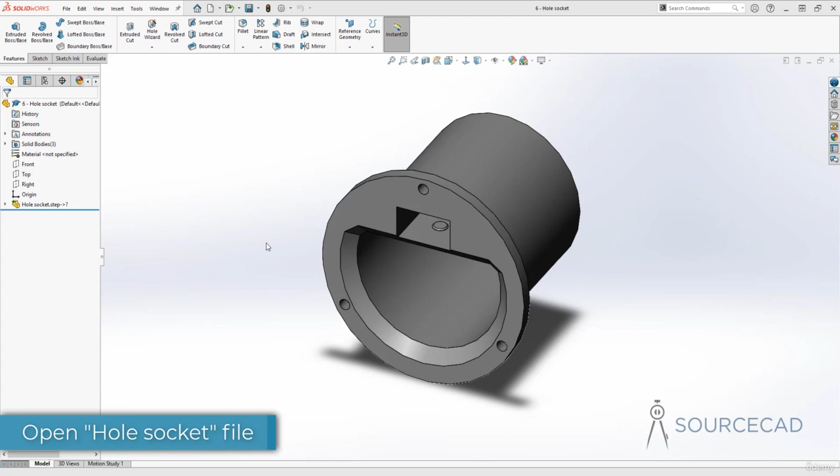Let's now talk about markups in SolidWorks. Using markup, you can mention changes that you need in your part right inside your SolidWorks part. You don't need to mention these changes in a separate file.

Now I'm using this part here, and let's for a moment assume that we want to make a few changes. For example, here we have 3 holes. We want 6 of these holes right here. Also, we want this chamfer to have a smaller length, and we want fillets on all these sharp corners. So these are some of the changes that we want in this part, and we just want to mention these changes somewhere in this file.

Now to do that, I'm going to use markup. The markup is available on its own separate tab, and right now we don't have that tab yet, but you can activate it. Right click anywhere on this tab, select tabs and activate markup right here. And now we have a new tab called markup. I'll select this tab, and here we have all the tools, but currently all of these tools are deactivated. As soon as you add a markup, the tools will show up.

Also, if you look at this design tree, we don't have any folder called markup, but once you add the first markup, a new folder will be created with all the markups. So let's go to this markup, and here we've got the folder now. Inside this folder, all the markups will be saved. After selecting this, you need to go to this draw option, and now you can draw with freehand sketch.

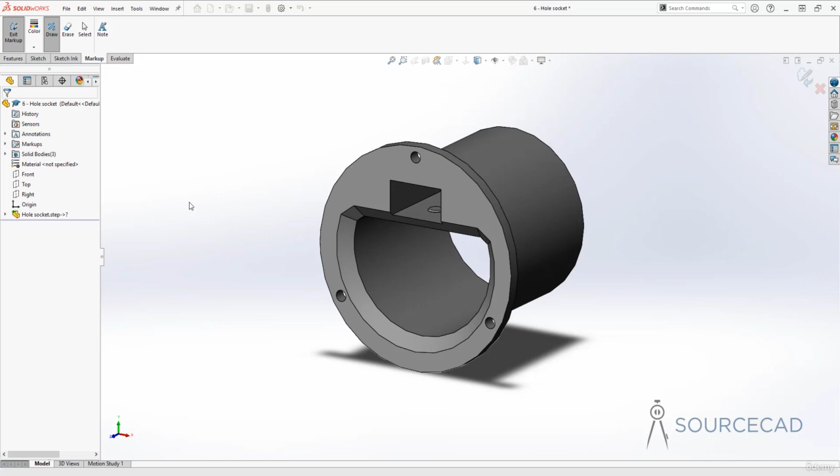I'm going to start with this hole, and make an arrow like this, and let's add a text here. I'm going to select note, and type make 6 holes. All right, so we've got this. Now click OK to exit out of this. Our first markup is added, and you can see that markup right here.

That's markup 1. If you want to add more details, once again you can go to draw and start making changes. But before I do that, let's change the color of this markup. Right now it's this yellowish color. I'm going to change this to red. And now let's make the second markup.

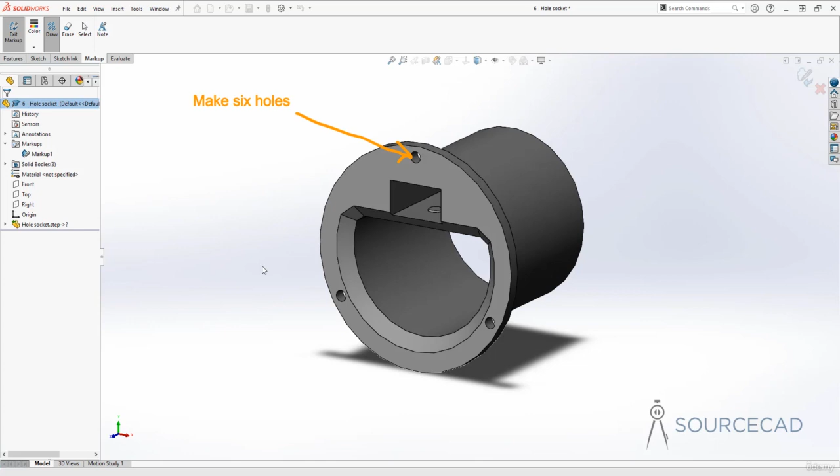I'm going to go to this part of the drawing, and here we want to change the chamfer distance. So I'll make this arrow and again a note. So here we have this note. Again, in this case, as you can see, the size of text is really huge. I'm going to make it a bit smaller, maybe 8 units.

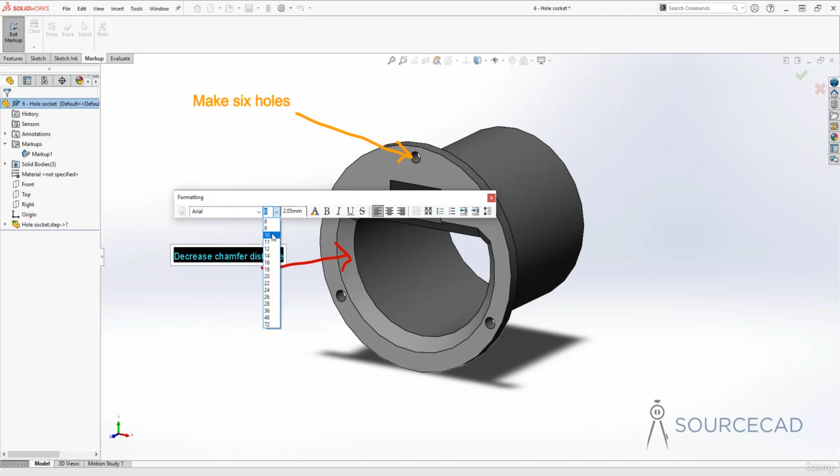All right, there we are. Or maybe we'll make it 9 units. 9 units is going to look fine here. So we've got this. Now I'm going to click OK. So that's our second markup.

Now finally, the third markup. But for adding the markups, I'm not going to orbit my drawing, because markups are added in your current view. So I'm not going to change that. To add the markup, I'm going to select another one here. But as you can see right now, when I added this markup, it will add it right inside markup 1.

So basically I've added 2 separate markups, but SolidWorks will think of it as a single markup because we have added it in just one single view. So now if you want to add another markup in a different view, then you need to first exit out of this markup environment. So I'll just exit out of this, and we have got this markup 1 added here.

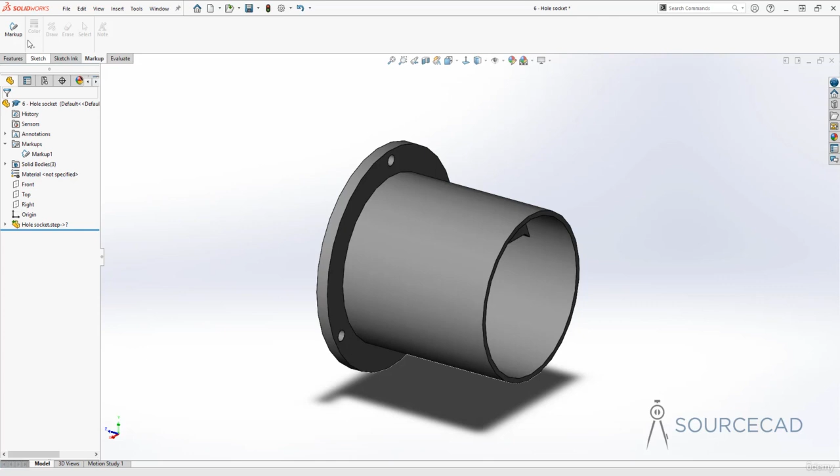Now let's orbit this drawing. And as you can see, when we orbit the drawing, the markup will disappear. Okay, so that's our first markup. Now we are ready to add the second one. Now in this view, once again, we can add another one. So I'll go to markup, and let's just add it here.

So right here, and we just want fillet. So here and maybe here as well. So on this corner also we want a fillet. So I'm going to attach it both with just a single arrow. So here, and then I'm going to add a note. So here, add fillets. There we are, we've got the second markup.

Now once again, without changing the view, if you add another markup, SolidWorks will just add it in markup 2. But if you exit out of this environment and then change the view and add a markup, it will add it as a new one. So here in this case, we are okay with these 2 markups only.

And now if for some reason you just want to erase any existing markup and maybe create a new one, you can also go to erase and then just click here, and that's going to erase it. But that's not what we want. So I'm going to just exit out of this environment. And here we are, we've got the 2 markups. Now markup 1 and markup 2.

Now if you want to go to any of these markups, just select that markup and select orient. Now this will automatically orient you to that direction or to that view. Again, here in markup 2, I'll select orient. It's going to take me to markup 2.

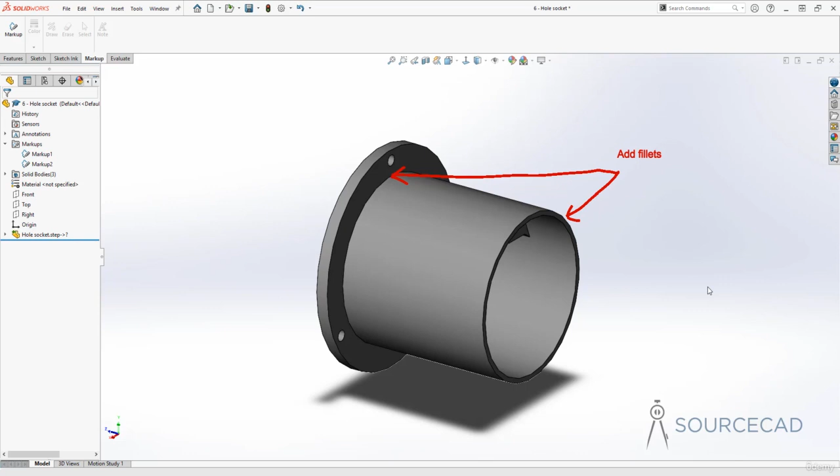Now you can also export these markups in a PDF file. For example, I'll go to this markup 1 and I'm going to select Orient. Now we can export this. So again, right click and select export markup. Now you can specify a location. So let's just specify desktop as the location, and I'm going to call it sample markup, and okay. And let's see now.

So here we are, here we have sample markup. So double click and that's our markup exported here in a PDF document. So you can now send this PDF document if you're not comfortable sending your actual SolidWorks file. And that's how you can export the markups.

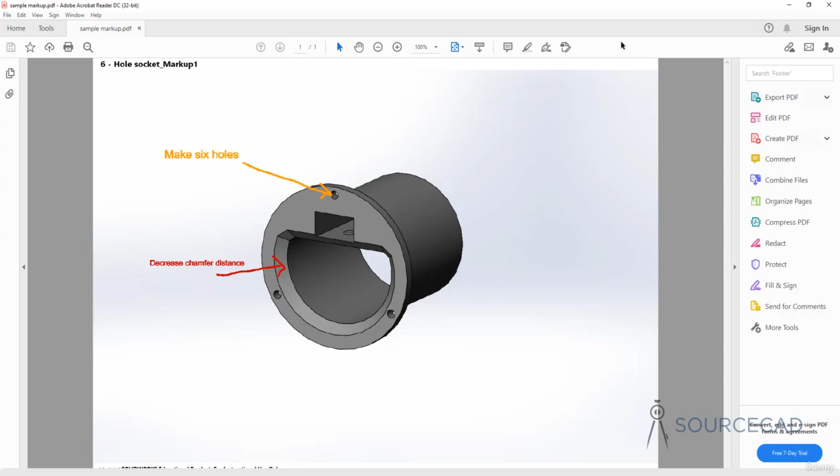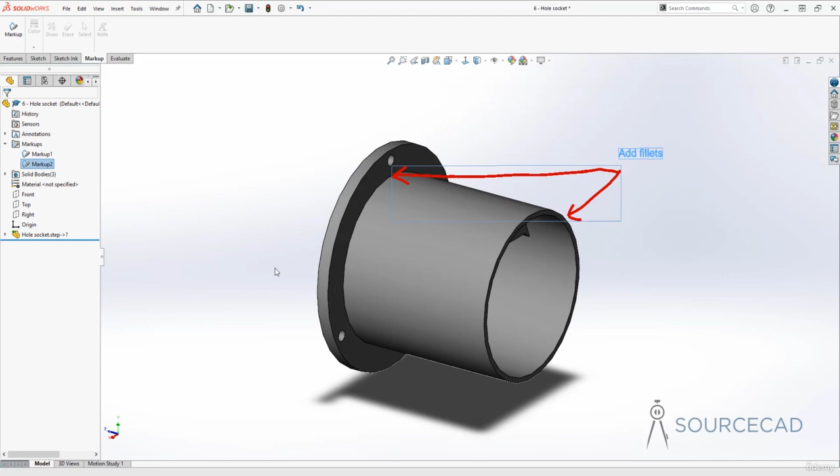But as you can see, you need to export several markups. So if you have created all of these markups in different views, then you may need to export several different PDFs if you want to just do that. Or if you just send this SolidWorks part file, well, anyone can just change to that markup view and see what's inside these markups. Now, if you want to hide these markups, you can do so very easily as well.

So just go to the markup and select hide, and now the markups won't show up, kind of like this. So here we are, we don't have the markup even when you orbit your drawing. If, however, you just make it visible, markups will show up when you orbit your drawing, kind of like this. So that's a thing which you may want to keep on or off depending upon your preferences. And that's how you can add markups in SolidWorks file.